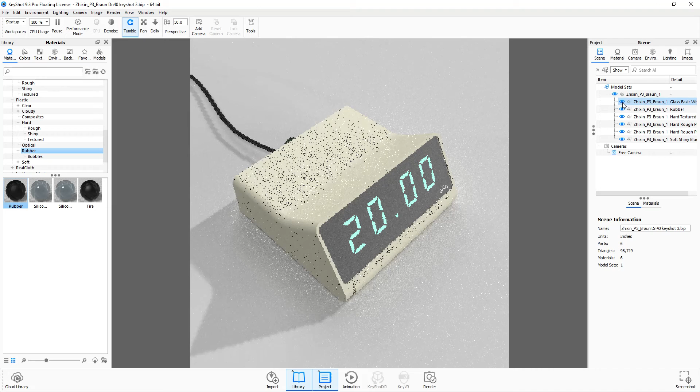But first, let's get this to be flat black. I'm going to turn on this glass piece. One thing I can do is copy over this back plate with the Braun logo, turn on the glass, and shift right click on this to paste that on. Obviously, we've lost the numbers now.

You can see here I have rubber ready to go. Again, we want this to be a flat, dark body. I noticed here we have rough plastic, but I think we can get even darker by applying rubber. If I drag the rubber material over and hold Control, it shouldn't overwrite the label. It's asking if I want a link - I'm going to say no. There you go, it left the label, because I held Control as I applied this.

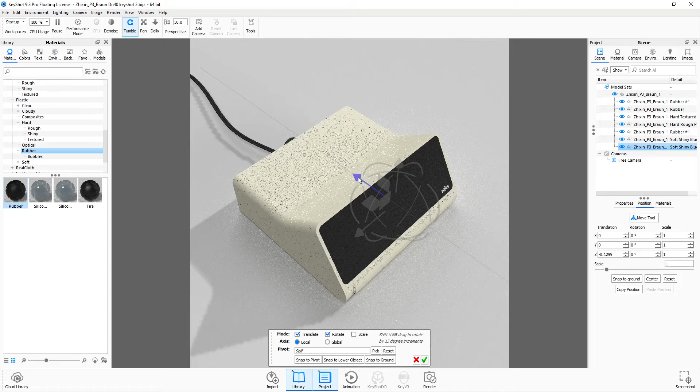Now, obviously, our numbers went away. So I'm going to duplicate the numbers - right click on this and say duplicate. And I'm simply going to move this forward until they're visible, and the minute they're visible, I'll just leave it there.

And I notice that this is an emissive material, and that's good, that's what we want. But what we want to do here is duplicate it. So again, right click and say duplicate. And then this one, I'm just going to float a little bit in front of the last one, just moving it forward. And this one, I want to change to an area light.

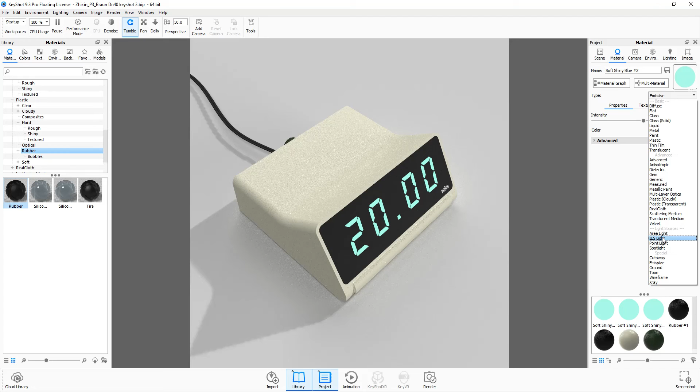And this will give it that glow effect. But now I also want to uncheck the box that says visible to camera, and that will leave us with just the glow and not the bright white numbers. That's essentially what I would do to get this close.

Of course, the area light can be played with as far as how bright it is, to get the amount of glow. The position can be played with in terms of its location, by right clicking here and saying move, depending on where we want the glow to be. I'd also argue that the emissive one's intensity could probably be turned up to get the desired effect. There's definitely a lot of playing in Keyshot to get what you want.

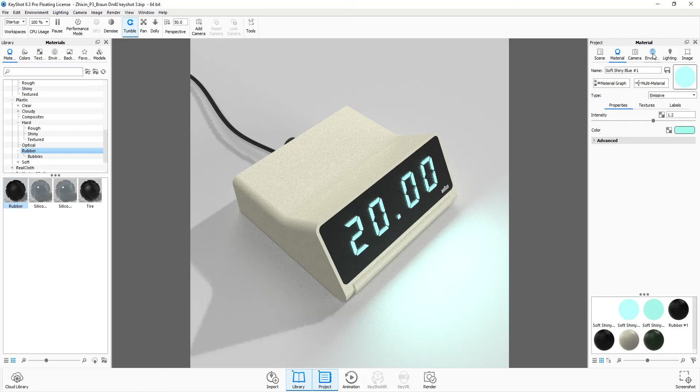I would also double check this lighting setup and consider revisiting this environment. If I just drag over, start this again and set this to be 1 - the lights I'm looking at in this image, I'm looking at this highlight here, the top, and then this front face.

So I might just start by adding pins. We can start by adding a pin on the top - it seems to be catching this back edge. I can add another pin, and it's catching this edge here. If the placement doesn't work, we need to click the target first, and then click over here to try and get this edge. And then finally add one more and position it on this top front face here.

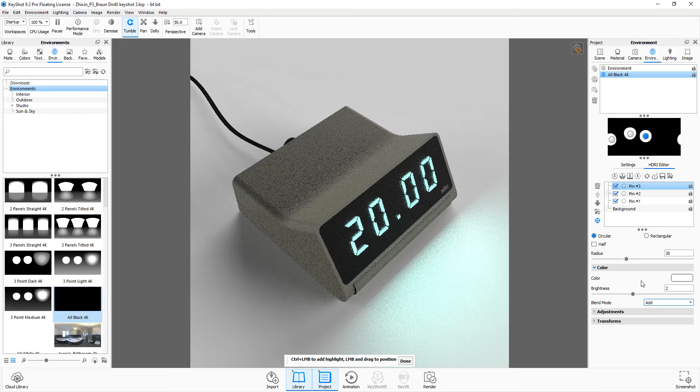And now it's just a matter of playing with these intensities. This front face is the brightest - let's put it at a 3 and see what happens. This first one that we placed, which one is it? I think it's this one.

We can maybe make it slightly bigger and also make this brighter. But it's definitely like playing around with these things to get it to where you want it to be. This is getting pretty bright now.

But it's something I would consider. I mean, the environment you have is okay, it's just maybe a little bit washed out, and I'm noticing there's just a lot of lights and things going on, so I think it can be simplified slightly, again in order to get some of these features a little bit more dialed. And of course, they can always be repositioned and placed.

But yeah, I think the key thing in terms of the light up numbers is changing this front face to rubber. I think if I double click on this, you can make the rubber even darker, right, if you want to try and match that image, by dragging down the specular. And again, with the light here, it's a matter of playing with this material.

So here we have the area light and its brightness and position. So now that I've turned this down, turned that rubber specularity down, we may want to make the area light brighter and possibly even reposition it.

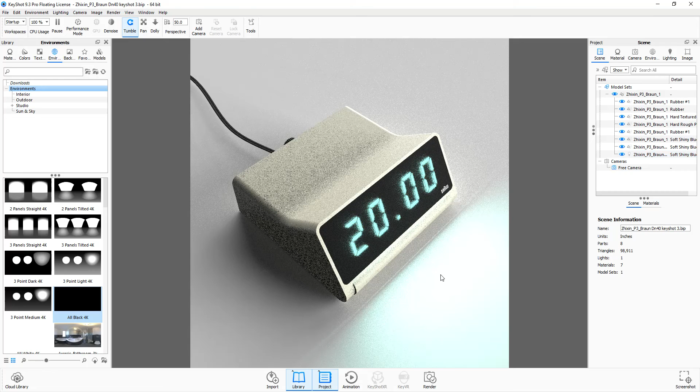So dragging it away, it will make that glow bigger. In terms of getting these bright spots, that would be splitting the surfaces in SolidWorks and turning the emissivity up for the center portions. The reason these are really bright, it's probably because there's a light in the center here or something. But I'm not worried to that level of detail. But if you wanted to go there, you could. So yeah, that would be my approach for this.

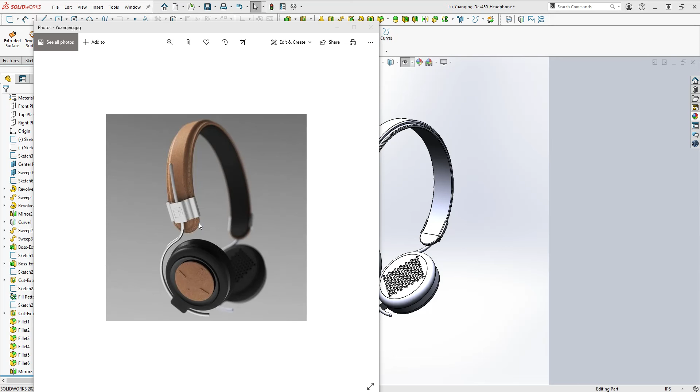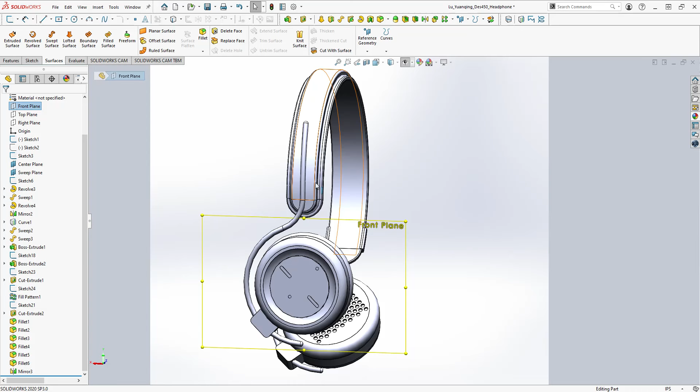All right, the question is how to put the threading on here. So for me, this is something that I would do in SolidWorks with a split line. It looks like this is a little bit darker, so it could just be a separate material. So here I'm in SolidWorks. I'm going to hide this piece. Now I want a plane that's perpendicular to the headband. So here we go. And what we can do is we can start to split line along this face, and we'll just do it on a quarter of it and mirror it, like delete and mirror it again.

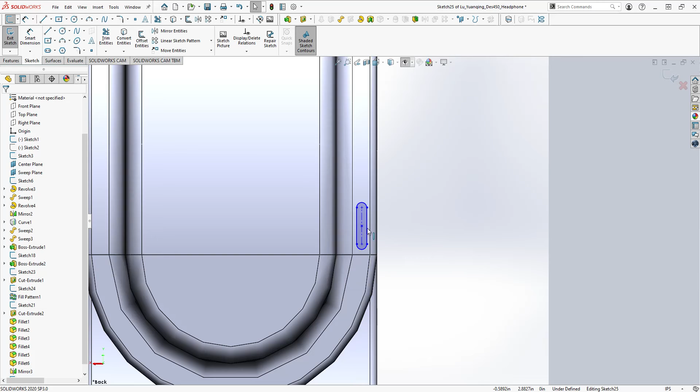So I'm going to create a sketch on this front face. I'm going to right click on the wire and just hide it so I can see this entirely. So the threads are essentially like these racetrack shapes. So we can make like a slot here. This is like the easy one because it's vertical. The harder one is this curve, but again, we only have to do half.

So I'm actually just going to use, this is kind of not great for the Jenga tower, but if it's at the end of the tree, it should be okay. Especially if your proportions are dialed in, this is going to be the easiest way to do that. So I'm selecting this edge and putting an offset. I'm selecting this edge and putting a similar offset. Honestly, it could probably even be smaller than this. Let's say 0.01.

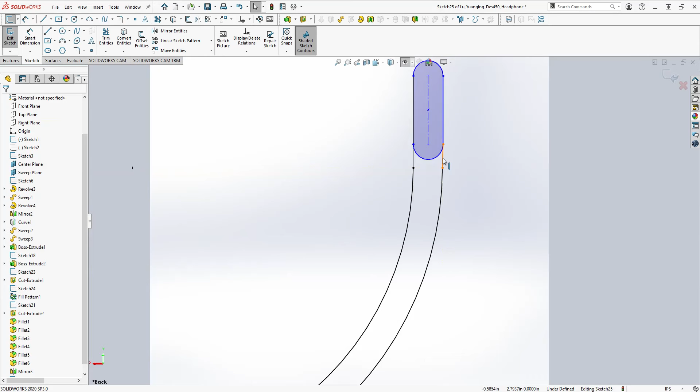And this is your file. So I'm matching exactly this. I'm not sure why that disappeared. It's a little bit weird, but it should be okay. We could also, to match the threads, use vertical construction lines here so that this one is the same width. And now here it's just a matter of sketching in a couple arcs and setting them to be tangent. And this here also tangent.

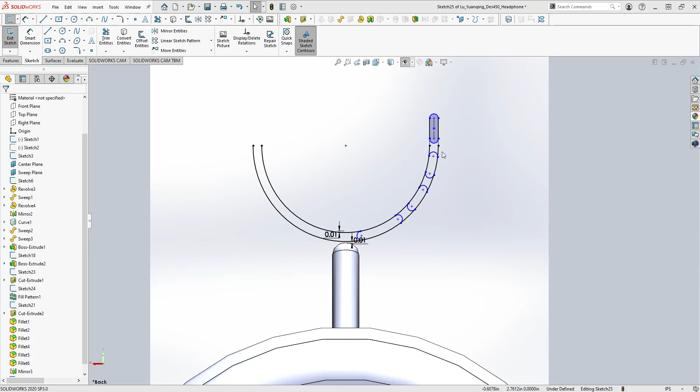And then just repeating that all the way down. So I've created a couple, one long one just to save time, but you can imagine it's the same process. It's creating these arcs. And once they're positioned, you can drag them to where you want. You could try to do a circular sketch pattern to save time, but I didn't mess with that. And basically what I'm going to do is treat this like a master sketch lower in the tree. So I'm actually exiting out of it.

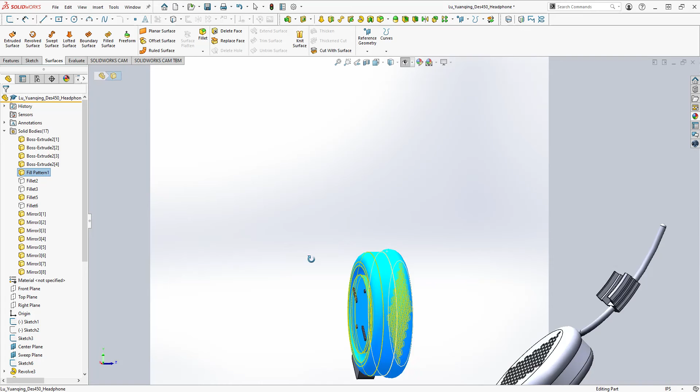It's kind of bothering me that I can't see the headband. And I think that's just a bug. SolidWorks does that sometimes. So I'm trying to find it here. Where is it? There it is. Oh, I guess it did hide itself. Or maybe I hid it by accident.

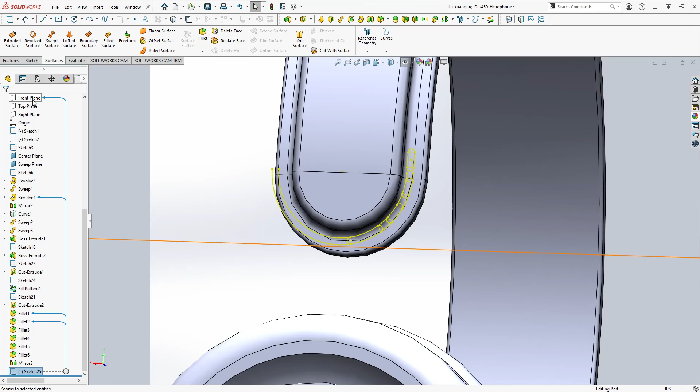And the reason why I'm treating this like a master sketch is, again, I'm going to create a new front plane sketch here. It's because this is all one offset line, and I don't want to trim it in this sketch, so I can always change the width of the threads. So I'm going to create a new sketch on the front plane. I'm going to select the sketch I just made and say convert entities. And now I can use T for the trim tool, and just cut all these out. And actually for this first command, I don't want this one. This is just for the curved loop.

And the command here is under features, split line. If you can't find it, you can search for it. It's also under surfaces and curves. It's hidden here as well. And while I'm in the sketch, I load it. It's using the current sketch as the split line, and then I can select this to put on the split. And so there we have some threads. Now the reason we put this other one in a different place is because we have to pattern it all the way along here. So let's try that.

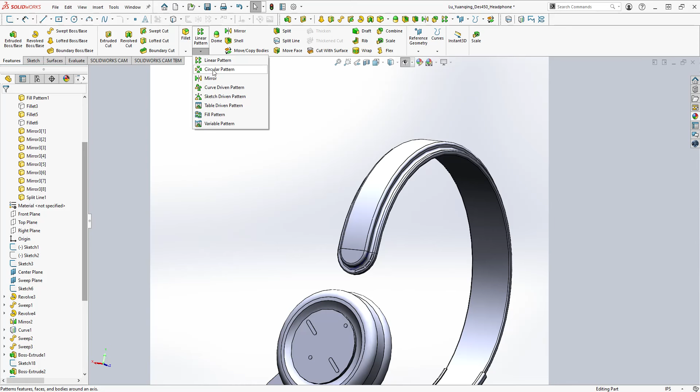I'm going to have to play with this. Right now I'm thinking that a circular pattern should work, provided that we have a central axis for this headband. And if that doesn't, we could maybe try a wrap command. So I'm going to play with this. All right, great. So this worked, and I can walk you through what I did.

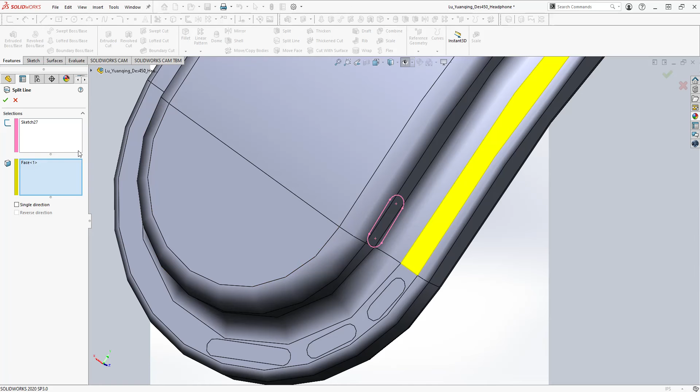So I copied over this sketch, loaded a new split line command, and so here's the sketch of the racetrack, and for the face, I selected this here. After that, I went to View, Hide Show, and turned all these on, or Alt-V. But also in this option, you want to turn on temporary axes.

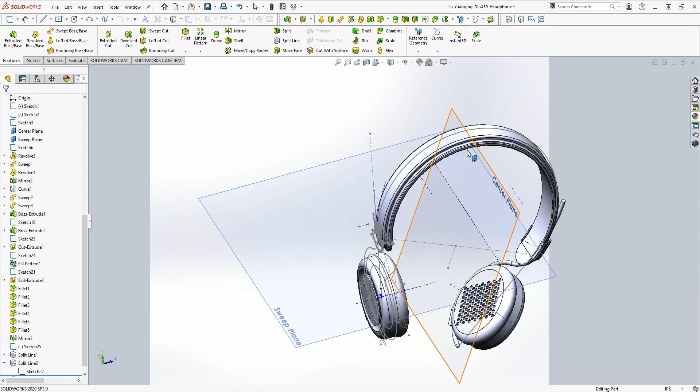And what this does is it puts in these dotted, dashed blue lines anywhere there's a center of a circle. So an obvious one is the earpiece here. But that gives us the central axis of the headband, which is this one in the middle. And so now that I have this split command here, I can load a circular pattern. For the direction, I select this temporary axis in the middle. There's a bunch in here, it doesn't matter which one you pick.

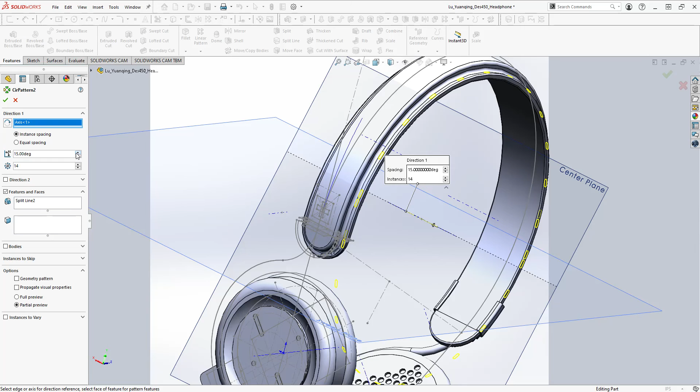And now for the settings, it defaults to equal spacing, but instead I selected instance spacing. So this allows me to tell the, here, this is more obvious this way, right? This one, it's putting a thread every 15 degrees. And here I can bump it up to whatever amount looks visually correct.

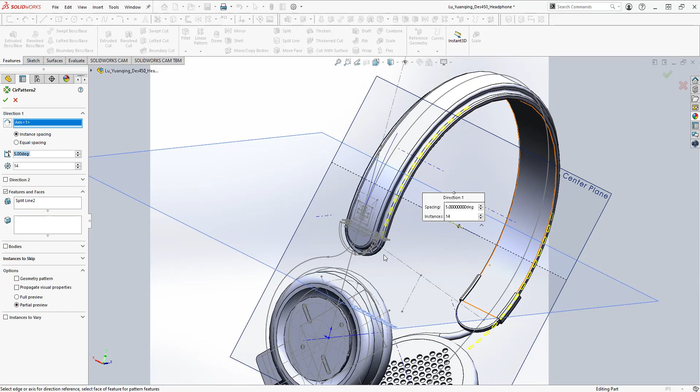I'll be honest, I'm not sure why it's putting it on this other side. That's kind of confusing me right now. I don't think it should do that. I feel like there's either a checkbox somewhere or something that I'm missing. But it doesn't matter. It still worked for me. So I think I clicked the green check. And now we can see it's running up here.

Obviously, we want it to go to halfway. So we do that by changing the amount of copies. So here's 14. Simply by increasing this number, it adds them all the way up. And again, our goal is really only to get this on a quarter of the headband. Because now what we're going to do is, I noticed that you have this positioned well. So I can use the center plane with a cut surface now, looking at where this arrow is pointing to cut away. Whoops, I didn't mean to do that.

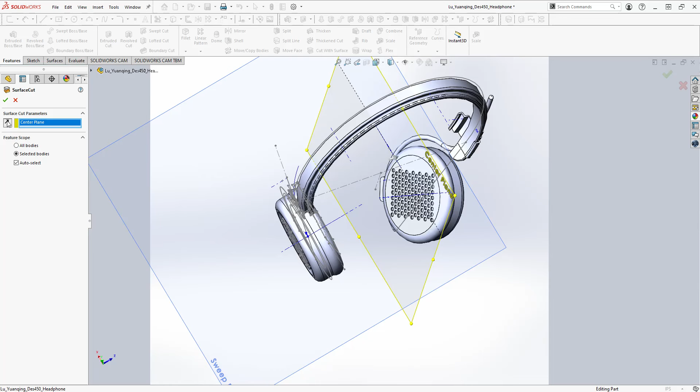I can edit this feature. We want it to cut away, so I'm going to flip this. I'm going to right click here and say clear selections. We only want it to cut away at the headband. And then you also have the center headband. We can say cut with surface and flip this, and we only want it to cut the headband.

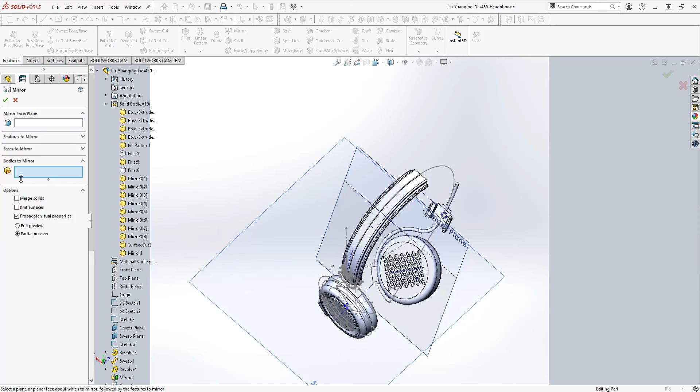And now we can use those exact same things to mirror. So here we can mirror. We want to do a body mirror and select this body. This mirror face can be the right plane. And then mirror, same thing, we want to use this body to mirror. I should have had merge result checked. I think that's what was missing there around the center plane, merge result. I should have done that for the first one to avoid the seam. But now we have this all the way around.

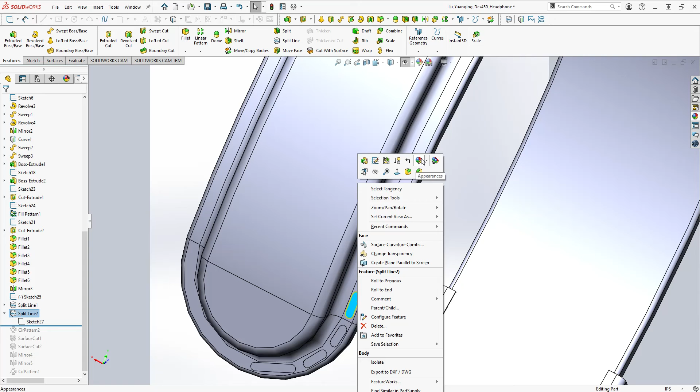Now last but not least is selecting out these faces, and this might take some time. You can actually try to do this before the circular pattern. Let's try that. So I'm going to right click on this face here, click on the beach ball and change the color. It doesn't matter what the color is, as long as it's different than the background. And if we edit this, I think there should be a checkbox. It doesn't always work, but propagate visual properties. It's kind of a buggy feature in SOLIDWORKS, but yeah, that's unfortunate. That means that's a lot of selecting.

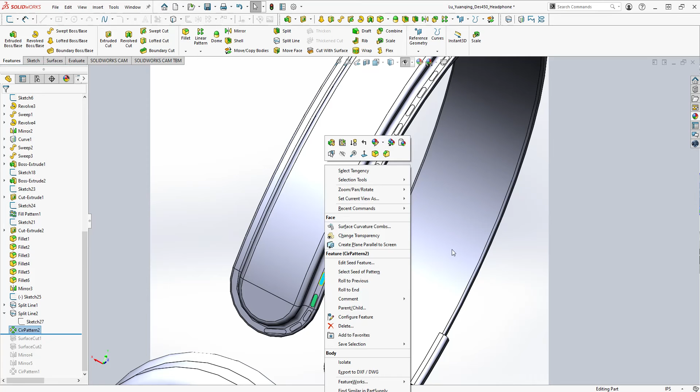So it's like clicking in all of these, but you have to do this so that when it's in KeyShot, you can apply a different material to it. We might be able to, let's see if I can do it to the command. No, I don't think it'll do it. Yeah, it does it to the whole face. Unfortunately, it doesn't do it only to these. I'm going to do an experiment and see if we can get it to mirror, at least with the visual properties. So you only have to do it for a quarter. So I'm just going to do one.

Okay, so at least it mirrors over. And that's because this is checked. I think if you did a new command, a new circular pattern, and check the propagate visual properties from the beginning. Let's try that. It might work. Maybe because I tried to add it after the fact.

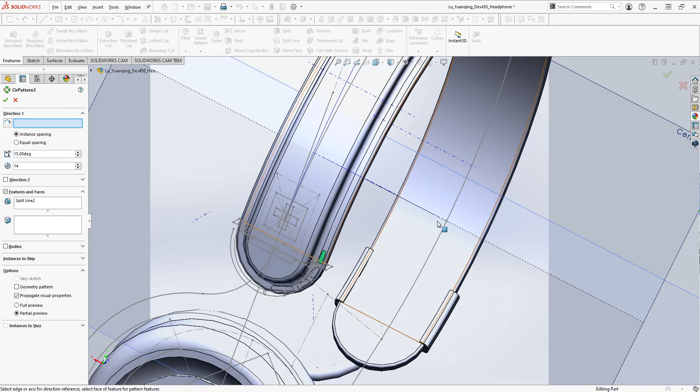Let's see if that works. Nope. Like I said, it's buggy. But yeah, and then you bring it into KeyShot, and then you can apply different material to that. As far as KeyShot goes, you have a pretty good gradient here.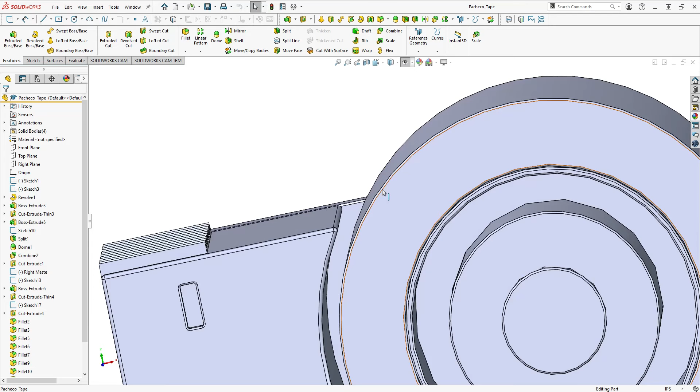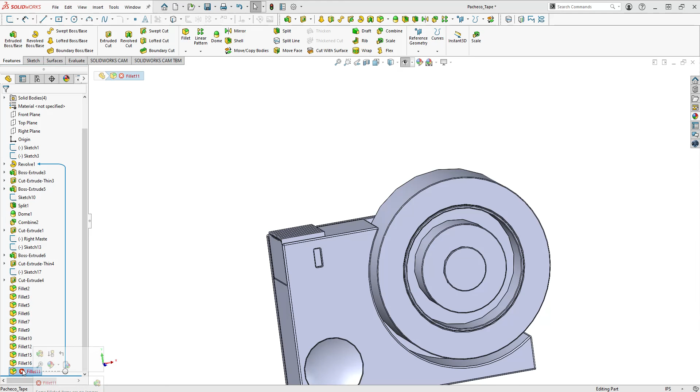All right, there's a question about creating a lip on the tape here, similar to this. And it's actually not too complicated. I would want to put the lip in maybe before this radius. Yeah, so actually I'm going to just drag this down. I was going to say, I don't think that should impact anything. I'm going to suppress that. It looks like maybe this, that's what's going on. Okay, so I'm going to drag this up here.

And I'm going to select this face and create a sketch on it. We can do that because it's flat, and I can say Alt-N to make it normal to me. And basically I'm sketching an arc. I want the arc to be coincident to this edge, not the face. Can I select the edge? There's the edge. Control and clicking on this and saying coincident. And then clicking on the edge and here and telling them to be tangent.

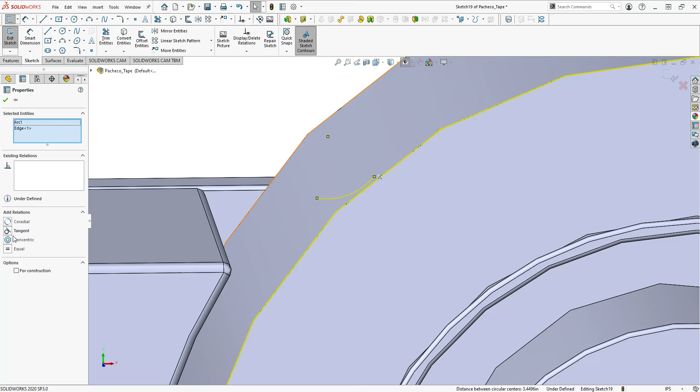Now it's weird. It doesn't look like it's on there. It's because I have this feature on to make it run faster. You can see if I hover, I don't know if you can see it flashing there. I'm not able to get it to stay on. But it's at a part where the circle is above this straight line, but trust that it's on there.

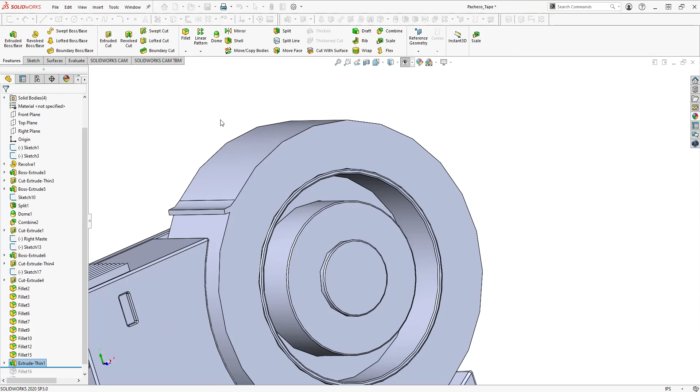And really it's just a matter of once you have the sketch created, saying extruded boss base. And because it's just a line, it automatically gives us this thin feature. It checks the box for us. I can flip it. We want it to be down and in the tape body. And I can just make this setting say up to surface and click on this back surface here. We want it to merge, but only with this body. And then I can check that result. And there we have just a little lip coming off. Now the question is, how well will this fillet work? It still works, so I think that's good. But yeah, that's how I would address that.

As far as KeyShot goes, looking at this, you're pretty good. Is there a texture on this face? It looks like there is. Nice work. That looks really good. I would just double check your lighting. So let's go to this environment here. Yeah, that's pretty good actually. I'm glad that you created, it looks like you modified it with this existing setting.

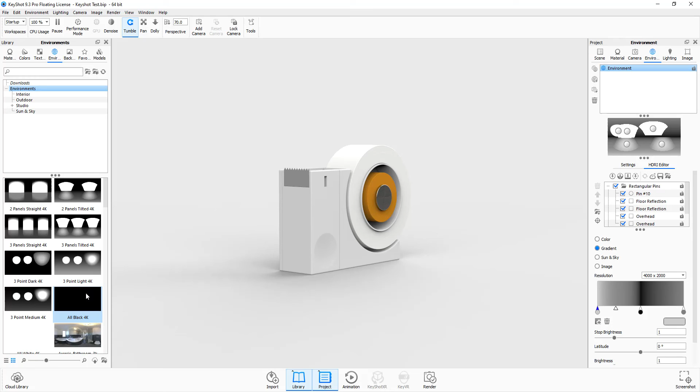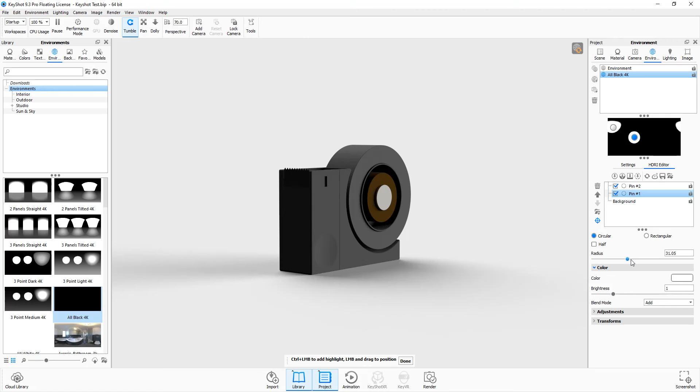I don't know, I'm always a fan of starting totally from scratch. Looking at this here, so clicking on this side face and going one at a time. It's maybe a bit more work, but I think you can get it to be closer. To position it, sometimes you need to click the target. So I don't know if we have it on here. And it's just a matter of looking back and forth between the two. But definitely this first one we put in here, I would make the radius bigger, make it brighter.

Things I'm going to be looking at will be like this dimple. So making sure that maybe this is a bit higher up. And again, if you need to reposition it, click on this and I don't know, maybe it's even more like here. There we go. That's looking pretty good because now we have a shadow here. So that's literally just dragging this around until I see what it looks like.

There you go. That's looking pretty good. And again, maybe even bumping the brightness up more on this one. So that's literally like 2 lights. This one here, I wonder if we can even just turn this off at this point. But yeah, looking at this radius here, it looks like it's catching.

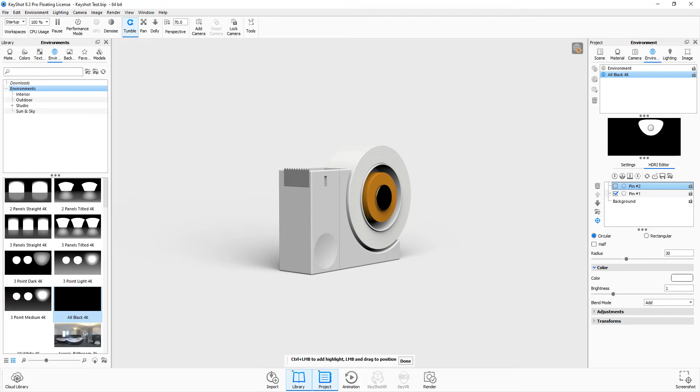Honestly, that's just one light, and I positioned it somewhere here. I guess you saw what I did. I was dragging it around. That's what I did to get it closer. But that's maybe all it takes, right? Simple is better. I'm also noticing this gap here. You can always make some of those changes in KeyShot.

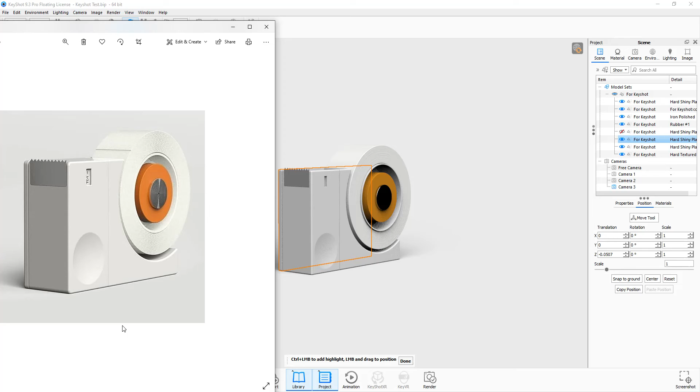I can find this back body. At least I think I can. Let me try and click on it to select it. And I can say move, and if I just scooch it back a touch, get that part line to read a little bit closer to this. Yeah, other than some of these details in here, everything's looking really good. I mean, I might build these in SolidWorks.

It looks like you might want some more lighting on this bottom foot. So let's see what you have going on. Nice, I like the custom environment. I don't know if a pin can work lighting on the underneath part. We can try it. So I can try and add a new pin and click on the foot. But yeah, that doesn't appear to be working.

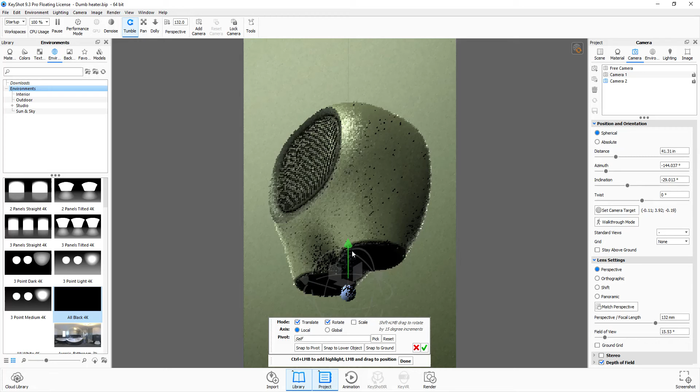So what I might do is, let me make sure your camera is here. Cool, I'll add another one just so I don't accidentally move that one. And what I'm gonna do is say edit, add geometry, and for me I'm just gonna add a sphere. And I can drag this down. I can change the size

here with the scale. And what I want to do is double click on this and change the material to, let's make it an area light and turn this way down to like 10. Change the color to a neutral white. And then uncheck the visibility to camera. Obviously, I guess we don't want it in between the two legs.

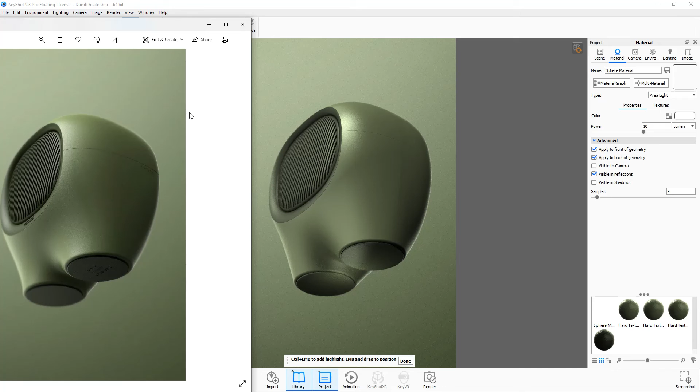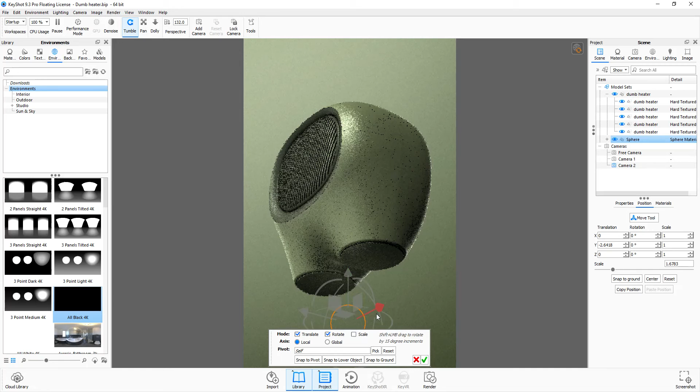But what I'm looking at is just that there's a little bit more light cast on these feet. It might take 2 of these spheres. It might take it being further down and away. That might be the simplest solution. Obviously, it's adding a little bit of a highlight there, which we don't want. So again, it might be playing with this position.

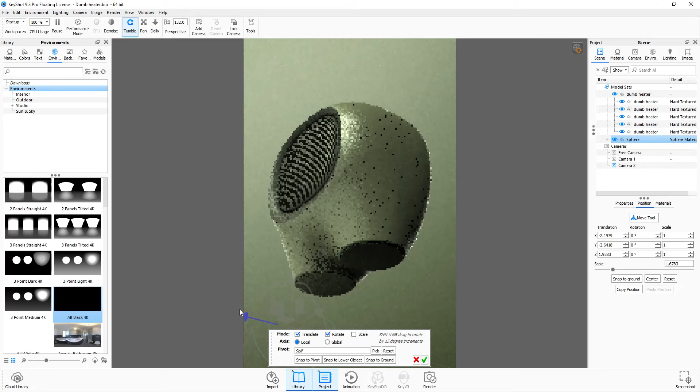Because I am noticing, actually, that there is a little bit of a highlight here and on this edge. So let's turn this off and see. So yeah, getting the position of this right might give you that highlight where you want it. I think it's just a matter of playing with it. But again, that said, you're pretty close.

I think that's the only thing missing lighting wise is the light on that foot, and that's how I would do that. And of course, we talked about the seam in SolidWorks, so that's the other thing I would address. All right, so what you have is looking really good, and it's really close. Just some things I'm noticing, but I can appreciate the challenge of them, is

this shadow, particularly right here, it's a little bit washed out. In playing with the lights, I can appreciate the challenge because you have an angled face here, which is lighter than this face, so you have this shadow down here, and any attempt to create contrast up here kind of knocks this shadow away. So I can understand that challenge. But we can talk about some options.

And then the other one is getting these to glow. But also in playing with these, I realized that using the area light trick, it tends to then cast a glow onto these front knobs here, but we can play with both of those. So firstly, with this contrast and shadow, a very simple change might be under your main settings here in your environment, just pumping up the contrast.

It's kind of low-hanging fruit, but dialing this number up, you might have to play with the individual lights to dial it in, but it will pump up some of these shadows and some of these contrasts. So that's a very simple thing to do.

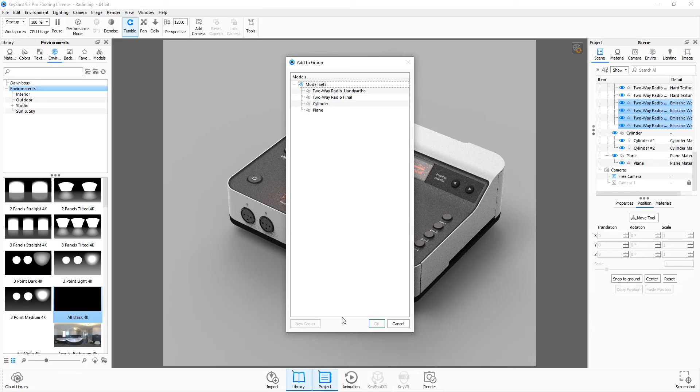And find this one. Sometimes I'll group all of these, right click on them and say add to group. Click on model sets, I can say lights. And now I can duplicate these.

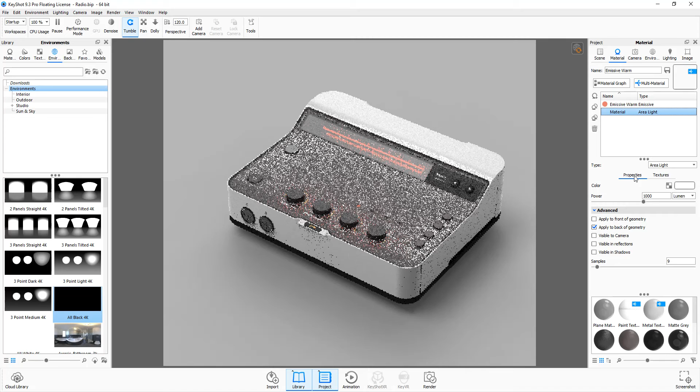Now I think I did notice that you have, if I double click on them - whoops, wrong one - you already had an area light loaded in here. Obviously the area light default is too bright, so I'm going to turn this down. I think it also correctly unchecked visible to camera. So let's see, I'm going to check this, and I'm going to say visible in reflections, I guess.

Now I know when it's in like in this pocket here. Let's turn off the first set of lights. Oops. It's just like this pure white, and even playing with the color of it.

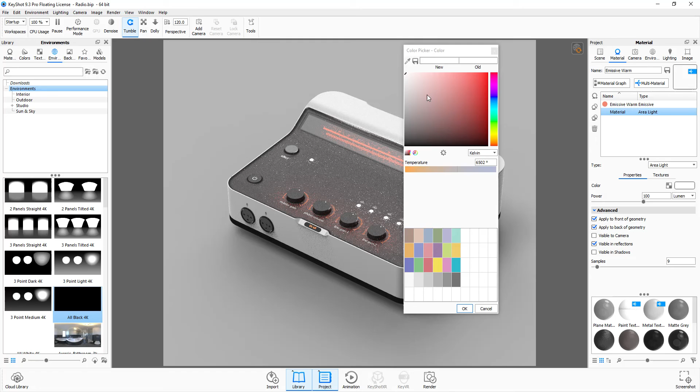Right, like material, edit material. I couldn't double click on it because it's not visible to camera. I noticed that even playing with this here, it still looks pure white, even if we try and match that. And I think it's the nature of what an area light is like.

And so that's why, let's see, can we dial that? What happens if we make this 1? I don't know, maybe that's the option. I didn't consider making this really, really low. Can we do fractions? I would play with something like that.

That might work actually with what we want, because now it's lighting up this back edge. We're still not getting that glow. I mean, the way to get the glow, I would say, is to move it up. But this is where I realize there's a challenge, because it's going to light the knobs here.

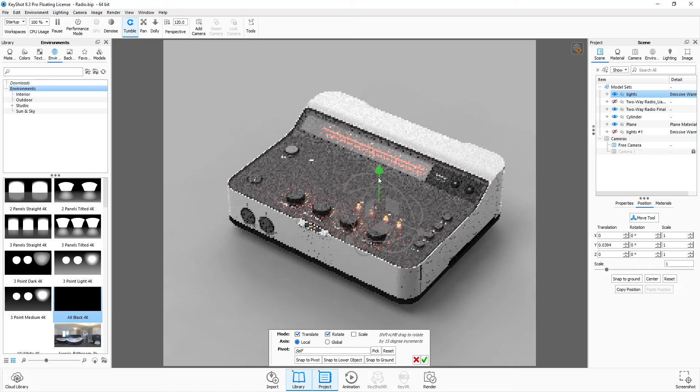So I don't know if it's just trying to keep it as low as humanly possible, just enough to get a glow. I think you can dial it in, I'm going to X out of here. Yeah, you can dial it in with the position tool here. So like 0.5 - oops, too much - 0.05. So you can dial this in incrementally, or 0.01.

And maybe that's what I would do. Actually, that's looking pretty close. Now again, you can play with these. If you right click on this and say edit the material, you can turn it invisible again to the camera, and then combine it with the emissive light to get the color and the effect you want.

So I would play with something like that. All right, so yeah, this is looking really good. I think you have the right materials on here. The reflections look like they're in the right place.

Is this the, yeah, okay. Now it looks like it's cropped really narrow. I don't know if that's on my screen or not, but make sure you leave enough headspace up here and down here. So I'm going to go over to image here.

There we go, I don't know what I did. I think I unclicked the aspect ratio and it added more headspace. I think I accidentally clicked it twice. So turn that off so that we have enough on the bottom and the top.

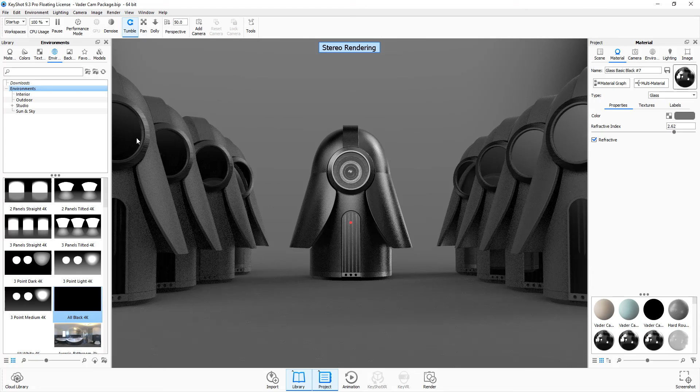Now I notice again, it's like this material that looks too glossy compared to the source image. These look flat. So I'm just going to see if I can just shift click and right click here, and I'm just going to do that on all of these. I shift clicked on the helmet and I'm just right clicking on all of these shiny faces, because it just looks flat to me here.

Now I notice you also have some brush material around the lens here. Honestly, it might even just be on these. Let's see what that looks like. Yeah, I think I would make all of these the same material, just one flat material.

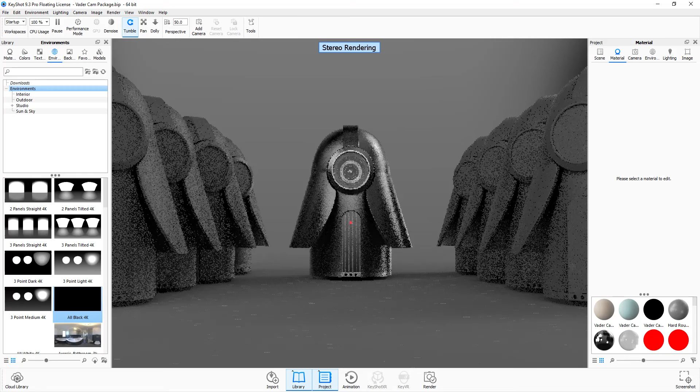As far as the center Vader goes, yeah, nice work. That's pretty good.

It might be a matter of playing with the lights. It looks like there's a dark shadow up here compared to this one. So let's see the environment.

I'm a fan of keeping it simple, but it looks like this is working. I don't know if it would be quite a task to find out what's causing this light here, but maybe turn that one down. That's kind of being picky though. I think you're pretty close, it's looking good.

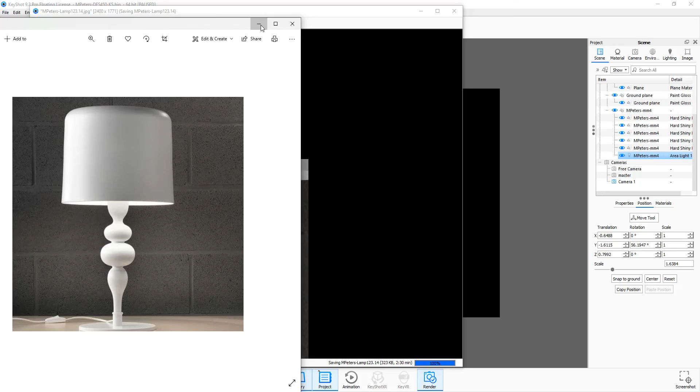All right, we had talked about getting rid of the graininess in the shadows here. Playing with this a bit, I think I found a working solution. I mean, it's better. I can show you what I did. I think the main key here was in the samples.

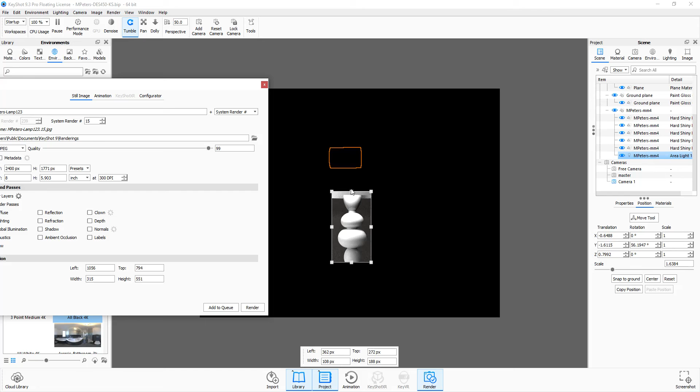A couple things. Firstly, if you need to play with this on your own, when you click on this render screen here, you can click on region render, and I think it starts with a full-size box. You just drag the sliders so you can render one specific area. That way you can test it.

Here you can see my render settings. My resolution is actually pretty low, but in options I bumped samples way up. Based on some Googling and this experiment, I think this is the key to the solution. I think the default is 64, I just doubled that.

So that's the one major change I made to the render settings, other than the region, just to check out one area. As far as seeing the whole thing again, you just want to go back to output and uncheck region, and now you can see your whole scene.

As far as the other things I changed, I double clicked on your material here and changed it from plastic transparent to just plastic. So I didn't mess with the material library, it's still your same settings, I just changed the type.

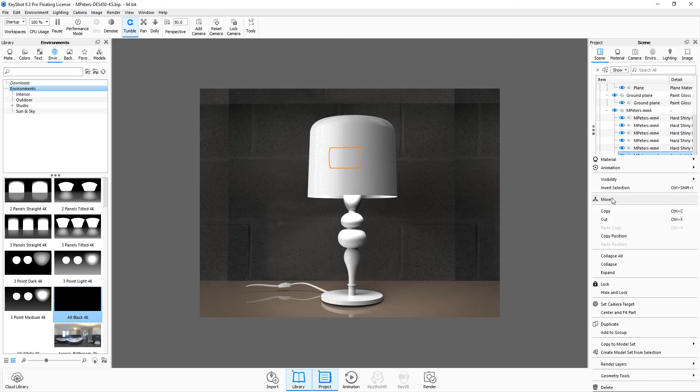The other major change I made was to your area light. I ended up moving it around. You can see I rotated it because it looks like you have a cylinder here. I ended up basically just dragging on these pointers until I was happy with the sort of light that was being cast on these bodies here.

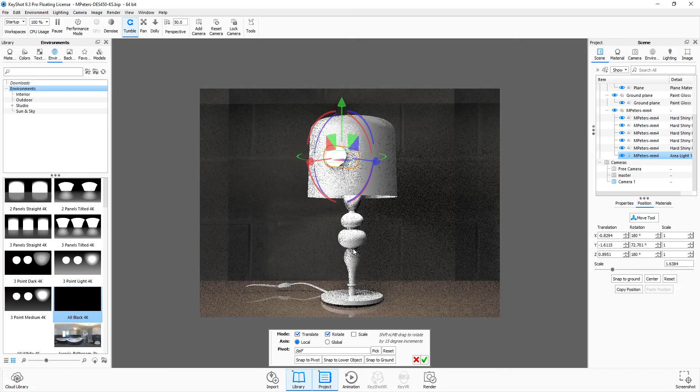I think the reason I ended up rotating it is because I kept dragging it forward to cast light down and onto the faces that we see, and I think I ended up rotating it just so it wouldn't pop out of the lamp. Obviously if you need to pivot to do this positioning, you can, but I ended up putting this light way front forward.

I also changed the scale, I made it bigger. I think it was at 1 before, I made it, you can see, 60% bigger roughly.

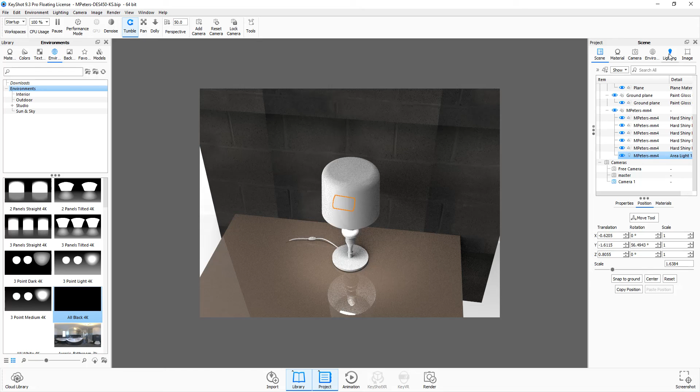Now the other change I made to the lights under here is I edited the material, and here are the settings I did. I changed the brightness way down because I moved it forward, I could turn it darker. I think the intensity of the light was causing some of the graininess.

I also unchecked visible to camera. I also changed it to an area light, I think it was a point light before. I don't know if that area light versus point light made a difference,

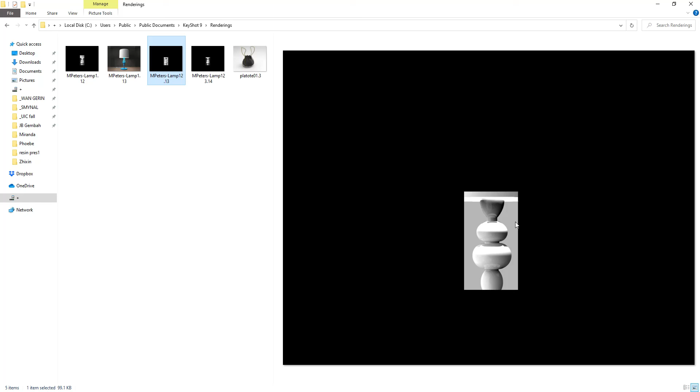I think in this one, the material was still the transparent. You can see there's a bit of graininess here. I turned the background off because I wasn't sure if it was reflecting some of the graininess in the background. I determined that I don't think it is. But yeah, the main difference between these two was the position and brightness of the light.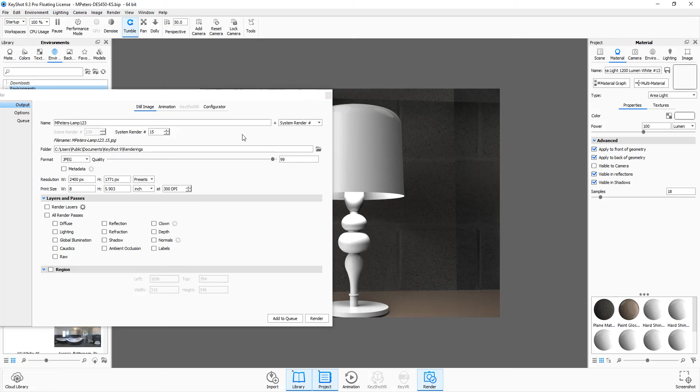I think it was your original setting of like 1200 lumens. This I knocked down to 100, but I moved it forward to account for that difference. So I think it's a mixture of the samples, the position of the light, the area light, and knocking down the power of the brightness. I don't know, you can double check, I forget if I changed these settings or not, but this is what I used to create those renders.

Now, the last thing I would do is fill out these edges here. I would try and move this, use the move body command in SolidWorks to try and get this to be on the ground. But other than those, I think you're on the right path.

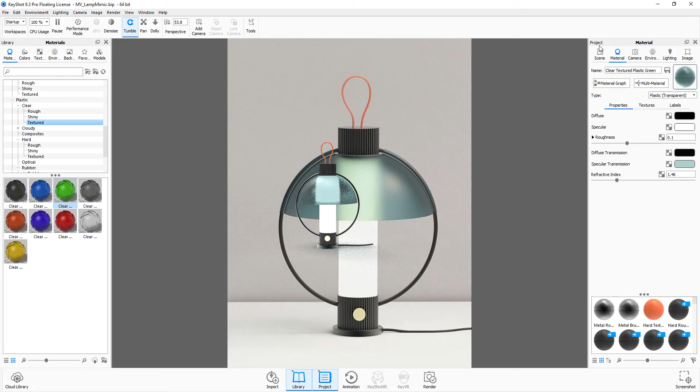Yeah, if you're able to load for this backplate image, if you're able to load your lamp here, by double clicking on this, you can actually select the color picker and pick directly from the image to try and get this color to be the same. Now it's not perfect, you can see how dark that is, but because it's also in the background, we can also just lighten this and click around until it's close. But then of course you can always load this back to the backplate image you had, or maybe figure out where that's located first. So that's the setting I would use for this.

It looks like you've already played with this brightness and have that as an area light. That looks right to me. It's maybe just a bit bright. I don't know, I'm probably fussing honestly. Yeah, that's definitely too dim at 300.

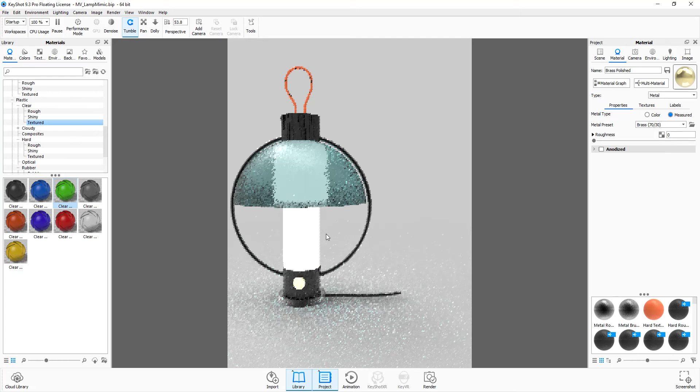The other thing is this brass piece is getting washed out, so I might look under metal. I mean, I agree with brass, but I might go with something more rough than shiny. Let me turn this way up. Yeah, just so it maintains some of that color. The reflectiveness is making it look too white.

Honestly though, if that doesn't work, the other thing I would try is literally just applying a brass color directly to this, using a plastic instead, because the metal might be too shiny. And here you can play with how reflective it looks by dragging this around. So I actually might recommend that route for this, again in terms of trying to get it to match this color a bit better. You know, maybe it could even go brighter.

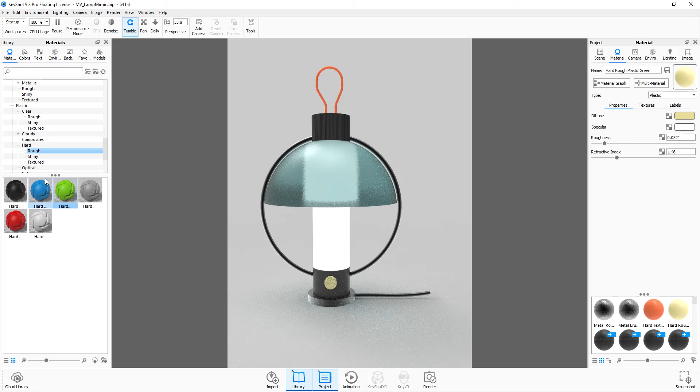Which is kind of counterintuitive, right? Because it's like a different material than what it actually is. But again, we're just trying to match the look and feel. Sometimes it's all about making it look how you want, not necessarily getting the exact material. So sometimes using a trick like that to match it could work.

All right, yeah, this is looking really good. There's a good start here. Just a couple observations: one, orienting this properly. I think it's just a matter of rotating this body. So we have some of these looks here. We can click on that and just rotate this.

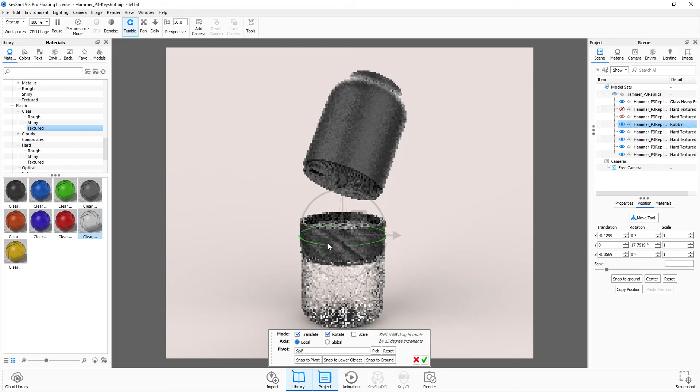I think we talked about this in class, how to solve that, and hopefully that helps you. You might want to take these arcs down a bit in SOLIDWORKS. They're just looking a little bit more dramatic than these ones are.

The other thing is the lighting. You got really close starting with this default scene and adding these lights. I'm a fan of really starting with just a black background and clicking on lights and going from there, adding as few lights as possible. So I would maybe click here and click in the center and see where that got us, or maybe start with the center here.

Upping this brightness and the radius. Obviously, I know this takes more time. Again, you were able to get really close with just the default, but I think you can get closer this way. If you need to position it, you need to click on this target, and we can click on this corner here.

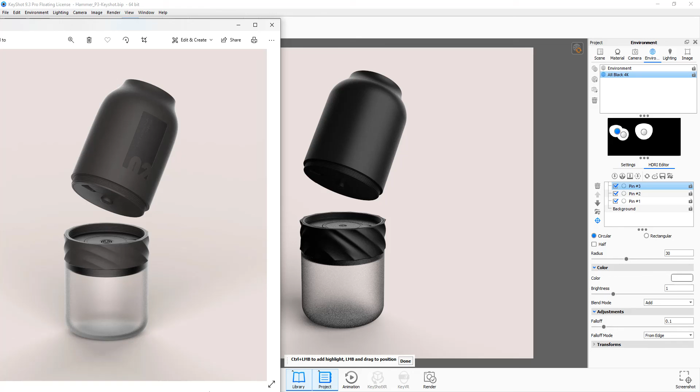Right, but already we're a lot closer here. Obviously, it's still too dark here, so maybe it's this main front light. Sometimes what I'll do is change this to a rectangle, and we can increase this. Sometimes I'll even drag it within this window to see what's happening.

If we need to add another light for this down here, that's a possibility. So I'm going to click on the position tool again, and here I'm just going to open up. Yeah, it looks like we're picking up this back edge, so I think it needs something like that.

But yeah, that would be my advice on the lights.

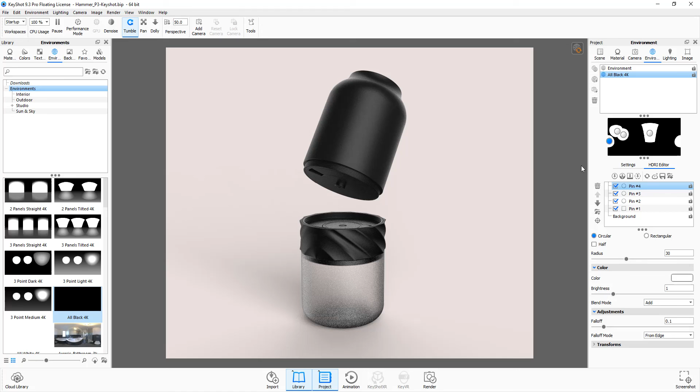Now, is this material here, I noticed it's glass and solid. I think in playing with this, the plastic, under plastic clear and textured, this worked a bit better to match. It gave us a bit more of a wall here, which is similar to what's going on here, and we see a little bit more of what's going on the inside.

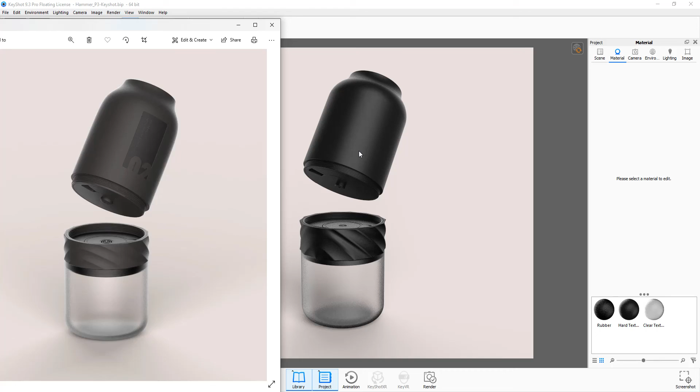And then some of the obvious things like getting in the decal and stuff, that can be done here with labels. Once the label is added in, I believe we looked at this in class, you can check the bump map and load the same one, and it should push it in or push it out. So yeah, definitely play with that.

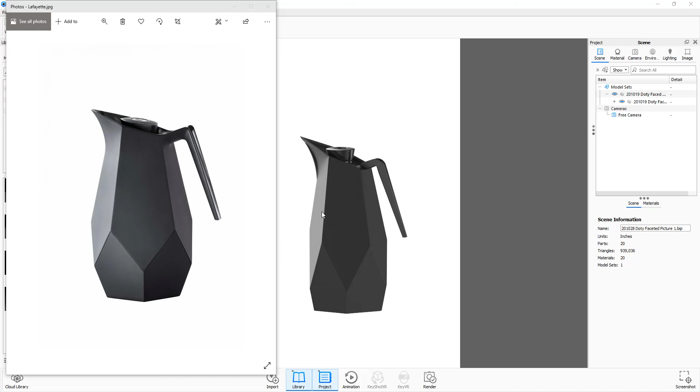All right, yeah, the main difference that I'm catching here is just to the lighting in terms of the render. You know, the material is pretty straightforward. I think it's good. I see black paint. Yeah, that works. It looks good. The other option would be like a plastic, hard, and either rough or shiny. But again, the paint looks good.

The main thing to the lighting, I'm a fan of starting from scratch. It's a bit more work, but I think you can get it to be exactly what you want. And because of the geometric nature, it should be pretty straightforward. I guess getting this gradient across here, that might be a bit of a trick.

But it's a matter of just clicking the pins and dropping them in different locations. So I'm going to click on this pin and click on this face for that position. You know, maybe it needs to be a bit bigger. All right, I'm trying to pick up some of the light down here. Of course, it's getting on the left face. So I'm just going to drag it over to the side a bit and say done for that one.

This one, again, looking back on this, maybe it's here. And if we want to try and get that gradient, we can try going for a rectangle, like rotating the angle, playing with the size, and also with the fall off. This will, of course, blur the edges.

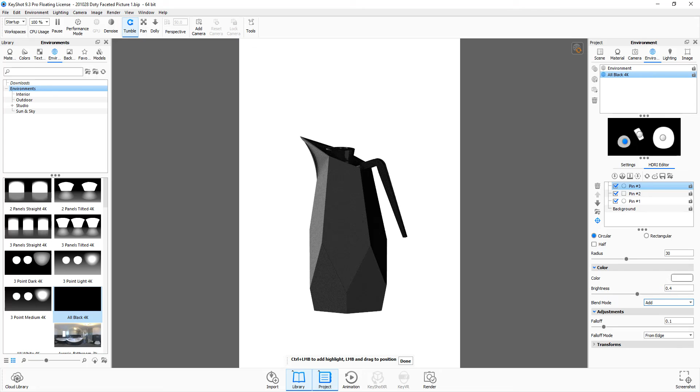And then as far as these other ones go, it really could just be adding a pin light for each of these, and just dialing in the brightness to what you want it to be. So here, this would be darker for this back face. Or maybe even we want to position this on here.

Let's add another one down here. But again, get the brightness way down. But just trying to match each of these faces and what we want them to be. So here, maybe this is actually brighter. I mean, another natural way to do this one would be to drag this back over so that it bleeds a little bit onto this back face.

Oops, I accidentally moved a light. I forgot to click done there. But yeah, I don't know, maybe it's just like making this really narrow.

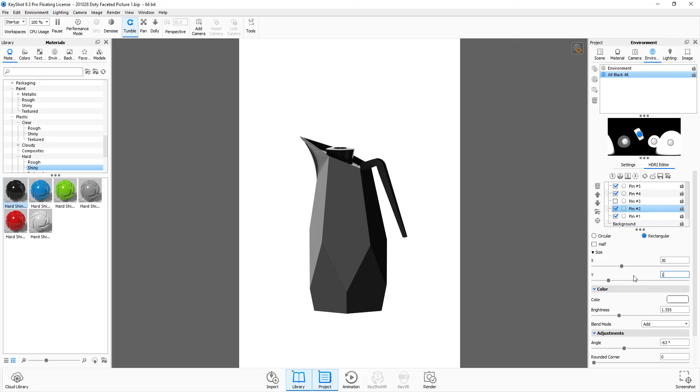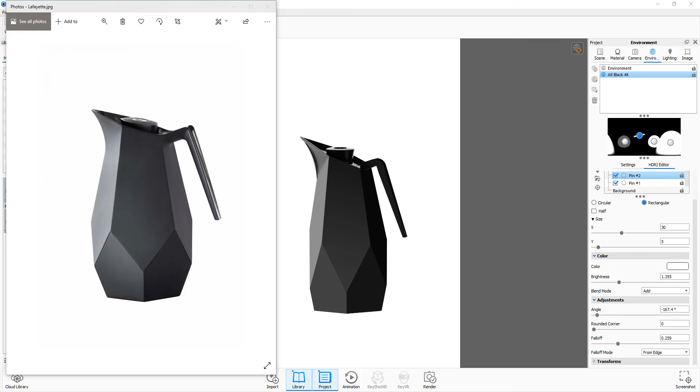There you go, we're starting to get a bit of a gradient now, just not the way we want it. I mean, yeah, gradients are a pain, and I guess rotating this seems to be helping. There we go. I'm literally just playing, right? I'm just rotating this angle until the gradient looks like it's going the direction I want it to go.

We kind of want this, but the opposite. So maybe it's just dragging this around. There we go, something like that. So yeah, that's shiny black plastic. But again, it should work with paint.

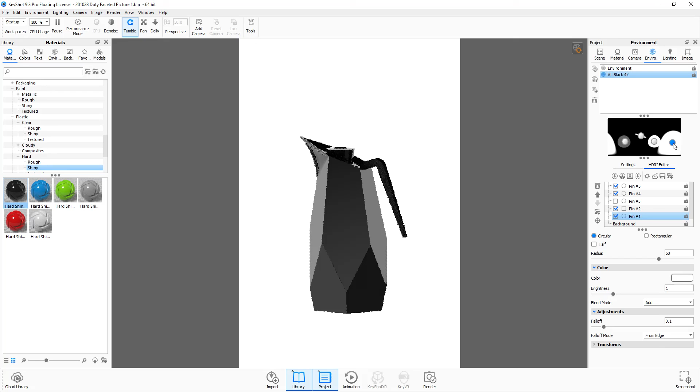And obviously, now we need to play with all these other lights, right, to get... just dragging that to the right seems to brighten this one up a bit. But that's how I'd approach the lighting to this model.